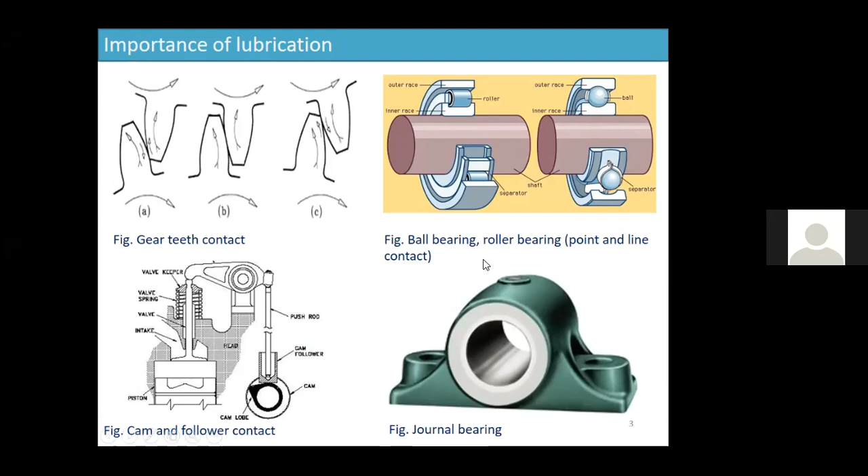So these are a few examples of lubricated machine elements, like we have gears, then roller bearing, ball bearing - that is point contact and line contact bearings, cams, journal bearings, etc. These are the most commonly used lubricated machine elements in rotating machines.

Apart from these rolling or sliding contact machine elements, we have some other applications of lubricants or cooling, like machining, then biolubrication, like we have hip joint, knee joint, shoulder joint, etc.

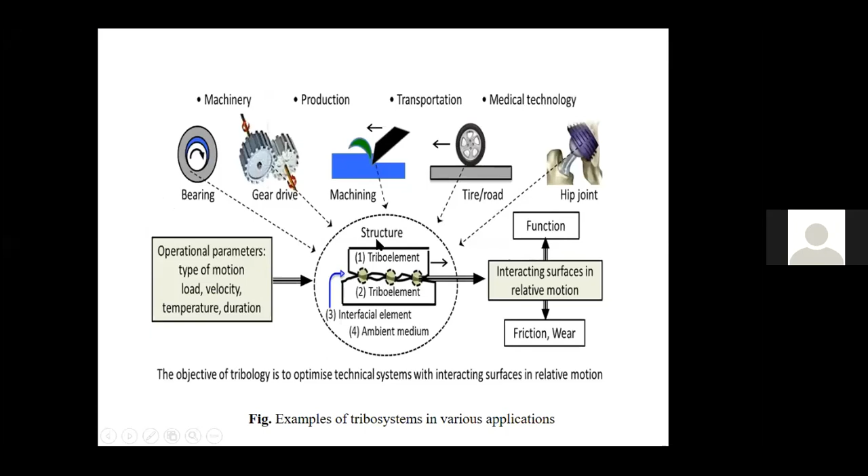So in all these lubricated machine elements, lubricant film thickness is very important. Lubricant film thickness depends on your viscosity and other properties of lubricant.

If you take the example of spur gear contacts - and it's not only spur gear - most of the lubricated machine elements will have a transition of lubrication regime in this fashion.

At the initial stage, most of the lubricated machine elements operate in hydrodynamic lubrication regime. Over a period of time, because of change in operating condition, etc., there will be transition from hydrodynamic to elasto-hydrodynamic, then boundary lubrication regime. This is an example of gear, spur gear.

Similarly, you can find these lubrication regimes in all these machine elements. The objective of lubrication is to maintain hydrodynamic or elasto-hydrodynamic lubrication regime in a rotating lubricated machine element. If you fail to maintain a proper lubrication regime, there will be transition into the boundary lubrication regime, which is not at all advisable.

For that purpose, we are using modern lubricants like SAE or other standards, along with some additives. So you can see the importance of lubricant film thickness.

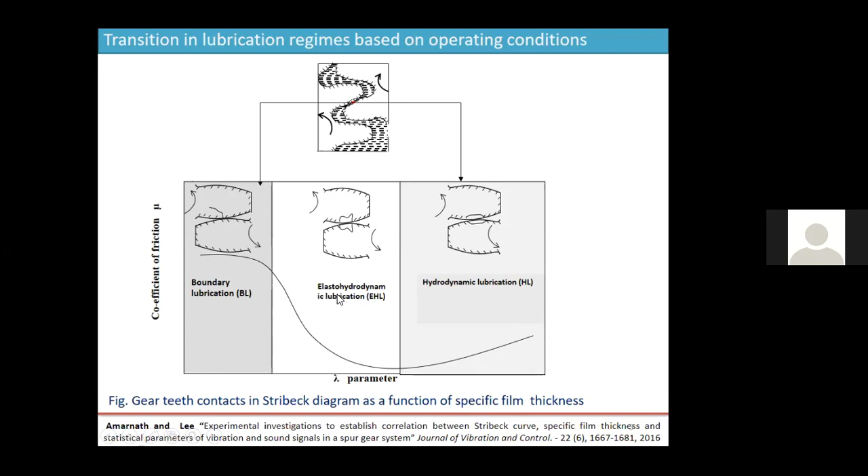If you have any questions, you can ask now, as far as this lubrication regime analysis is concerned. Or shall I proceed? No questions, sir? Okay sir. Yes. Ramchandra, any questions in this? Yeah, so at the end we'll have a couple of questions. Now we'll complete the session.

As we increase the load, temperature is increasing. So we can estimate lubricant film thickness using Dowson's equation. Here the only change in factor is load. So with respect to increase in load, lubricant film temperature is also increasing and film thickness is decreasing in this fashion.

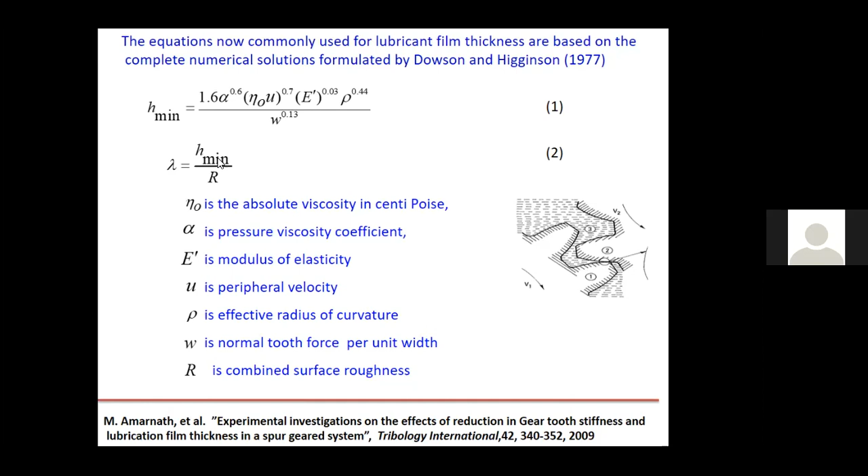So we have everything in hand, that is film thickness and combined surface roughness. By using these two parameters, you will get lambda, that is the transition of lubrication regime with respect to number of load cycles.

By using this, you can get the details of scoring damage. If lambda is greater than 3, then the scoring is minimum. It is under full film lubrication regime. Almost no wear happens, or very negligible wear happens during this full film lubrication regime.

If it is between 1.4 to 3, then it is EHL, elasto-hydrodynamic lubrication regime. If it is less than 1.4, then the gear system is operating under boundary lubrication regime. Maintenance action is supposed to be taken during boundary lubrication regime. So this is the criteria for possible scoring damage.

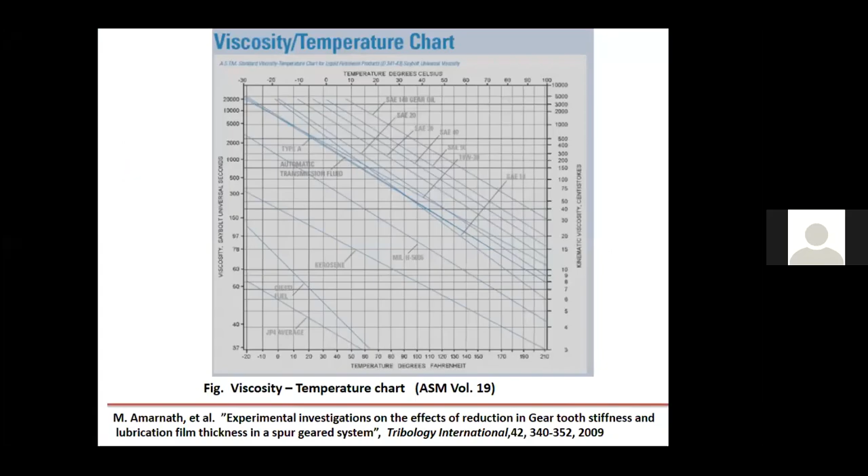In addition to this, you can also consider wear particle analysis. I'm explaining these parameters because all of them will be considered in nano lubrication regime to get the details of nano lubricant performance. All these parameters should show minimum reduction if you use nano lubricants. That is the objective of discussing these lubrication aspects of machine elements.

For example, specific film thickness - this parameter is estimated by using ordinary SAE oil. If you use nano particle based SAE oil, then the specific film thickness should improve. There will be enhancement in lubrication regimes. That is the purpose of discussing this lubricant parameter, lubrication analysis of gears.

In addition to lubrication regime analysis, we have also carried out experiments on wear particle analysis. It is very simple - you take one drop of oil, about 5 ml from the gearbox, and go for wear particle analysis. This is called wear particle morphology.

The wear particle morphology gives the details of wear progression in the gearbox. Not only in gearbox, it can be a bearing, an engine, etc. This is a typical image of wear particle analysis. Based on this morphology, you can get the details of wear propagation in the machine element.

This is done using a filtration system, called the filtergram technique. A vacuum pump is used, and a cellulose membrane filter paper is used to filter out the wear particles from the lubricant sample. The lubricant oil is dissolved in acetone or some other appropriate chemical for filtration, about 1:50 ratio. Then it is filtered using this filtration system.

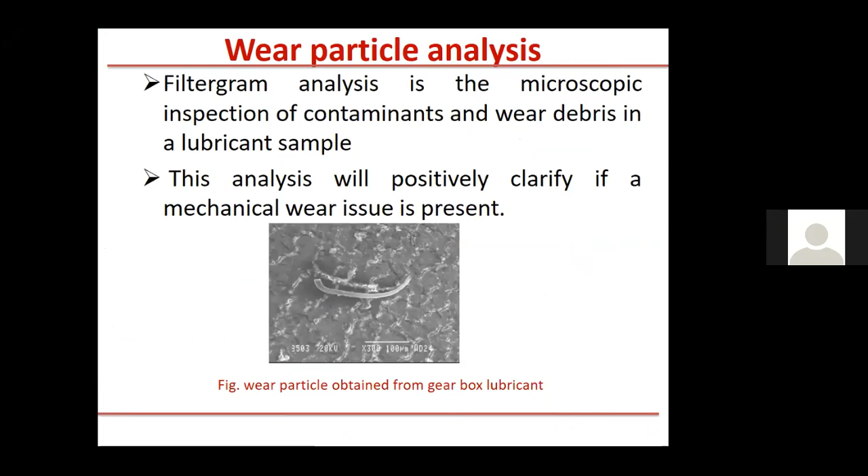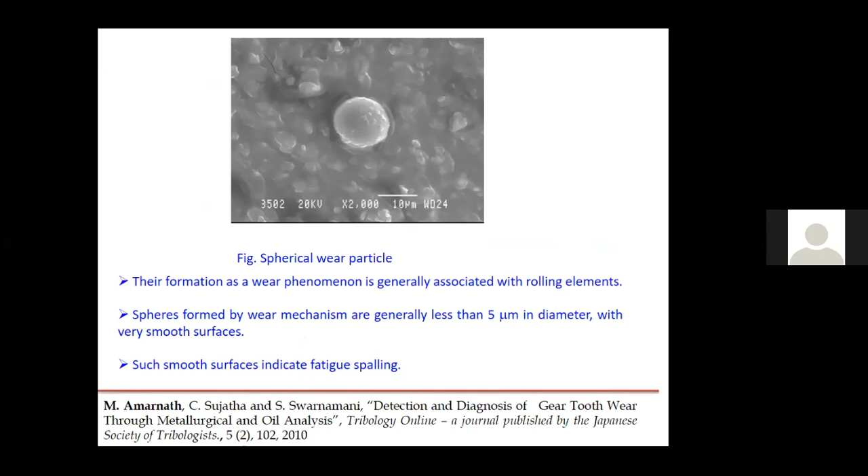There is a direct relation between wear and vibration. When wear increases, there will be variation in stiffness of machine element. Because of this variation, it will directly affect the dynamic response of the machine element. That will be diagnosed using vibration analysis.

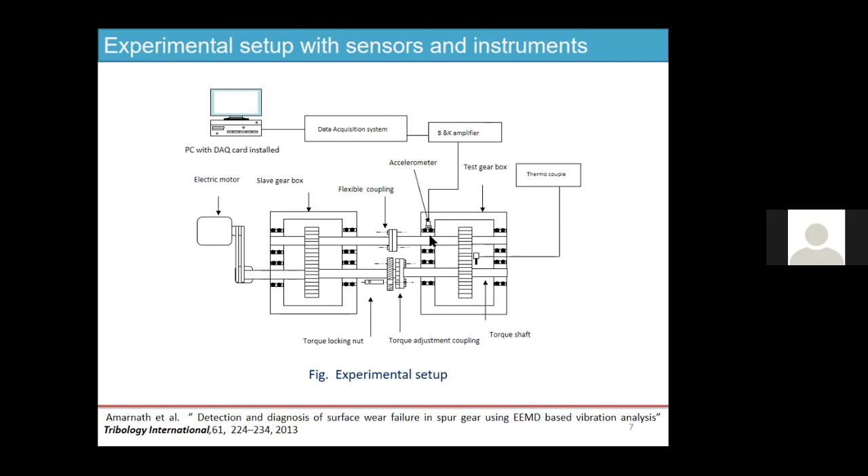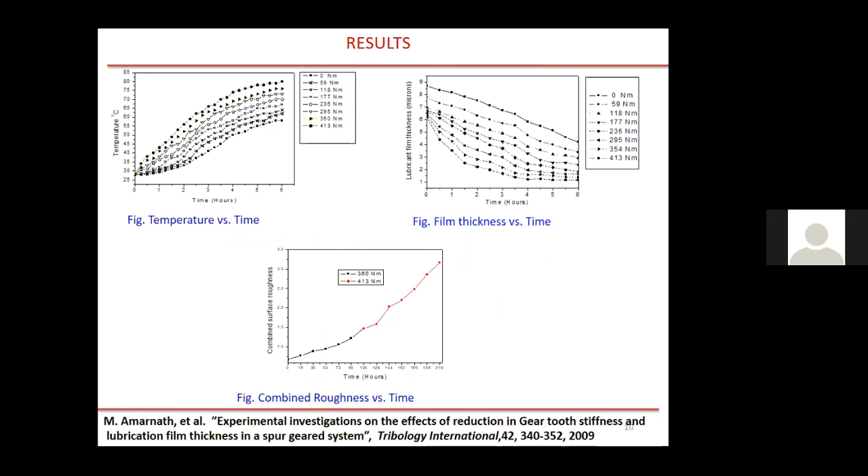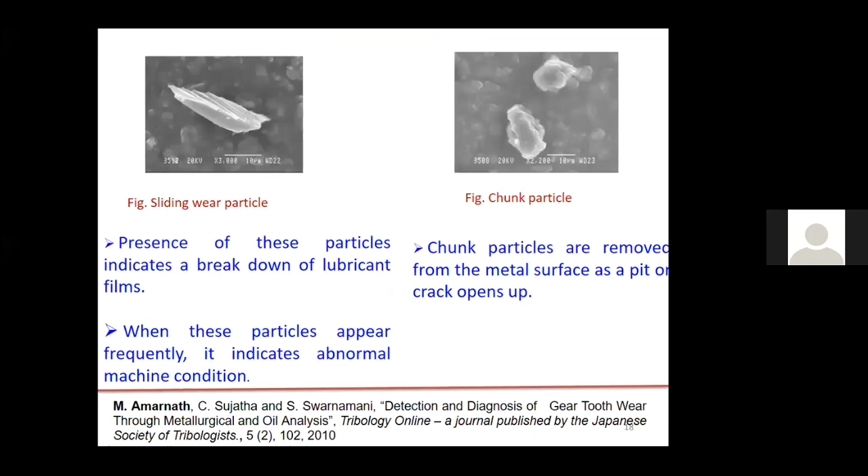So these are some details of lubrication regime analysis and its effect on wear in a geared system. Similar trends will be there in other machine elements like roller bearings, ball bearings, journal bearings, cams, IC engine components, etc.

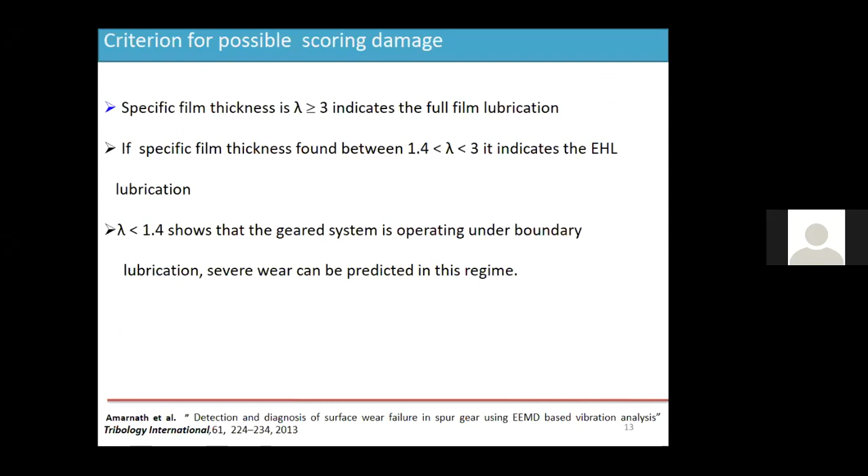We can use film thickness analysis, vibration monitoring analysis, wear particle analysis, oil contamination analysis, etc. The purpose of using nano lubricant is to minimize the severity of these wear parameters and maximize the performance of lubricated machine elements.

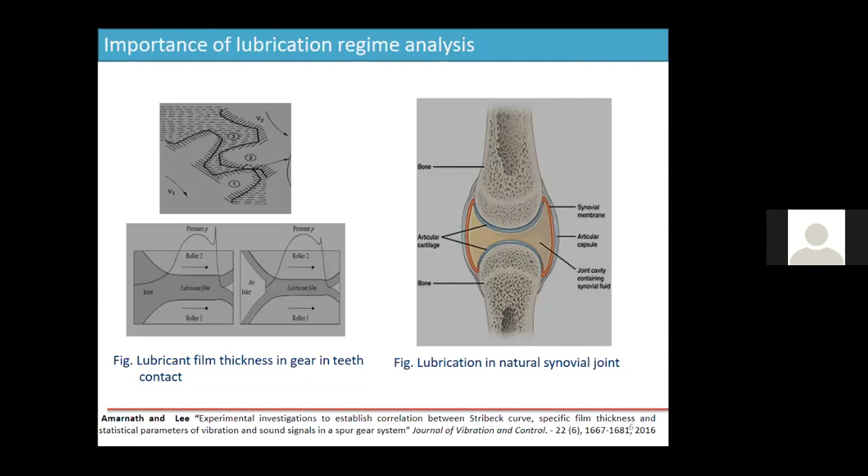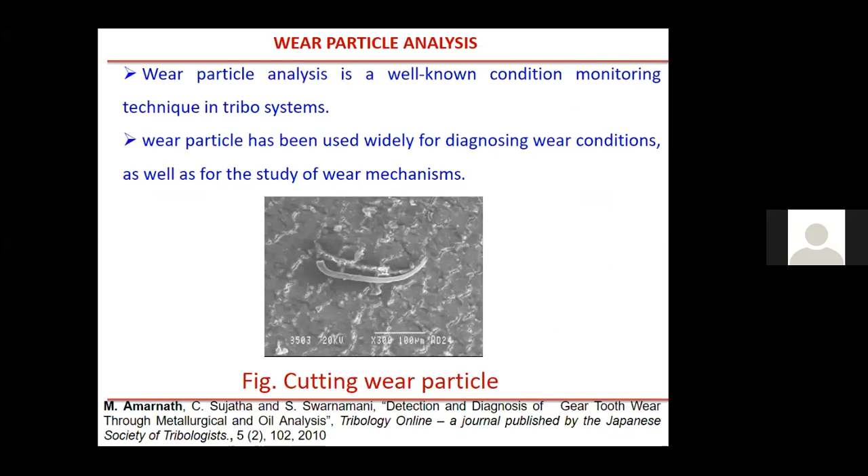So in order to know the details of nano lubrication, we have discussed the lubrication regime of machine elements, and now we shall go to nano lubrication aspects. We discussed film thickness analysis, surface fatigue wear analysis on gear tooth contact surfaces, wear particle analysis and corresponding vibration signal analysis. These are the common parameters discussed in assessment of wear in lubricated machine elements.

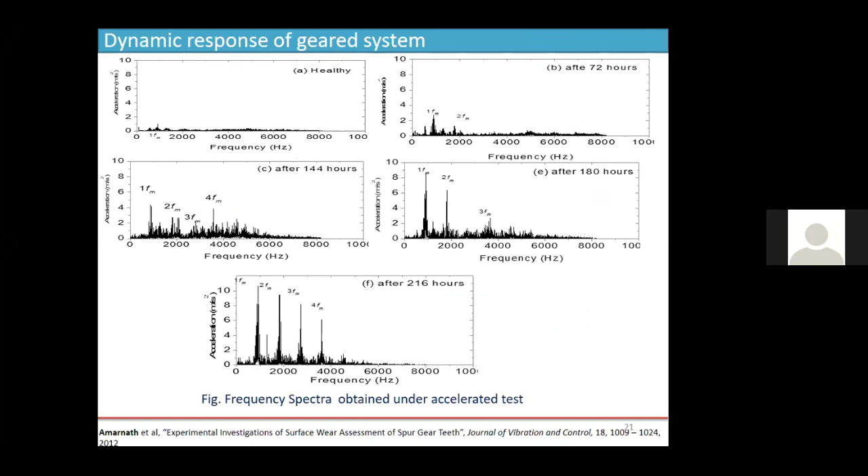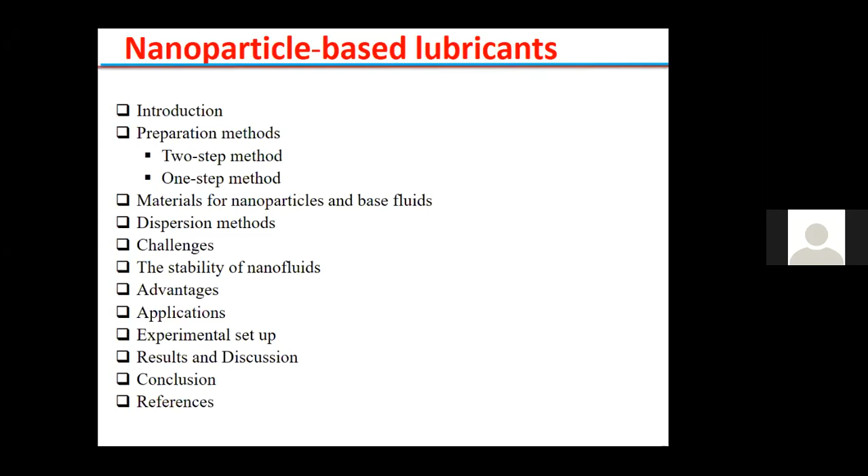Let us see how nanoparticles help minimize wear in lubricated machine elements. We need to know the preparation methods, materials for nanoparticles and base fluids, dispersion methods, challenges, stability of nanofluids, advantages and applications. Our experimental setup is also there to analyze the performance of nanoparticle based lubricants.

Nanofluids were coined by Stephen Choi in 1995. Nanofluids are a comparatively new class of fluids engineered by dispersing nanometer-sized materials in a base fluid. Nanoparticles possess thermophysical properties such as thermal conductivity, thermal diffusivity, viscosity, and convective heat transfer coefficient, etc.

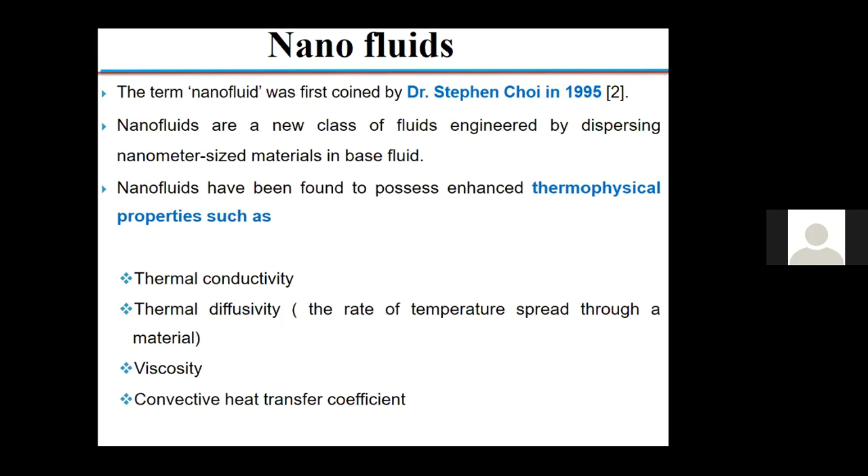We have various nanoparticles and base fluids. Metallic nanoparticles, non-metallic oxides, carbides, ceramics, and hybrid nanoparticles are there. Base fluids can be water, oil and other lubricants, biofluids, polymer solutions, etc.

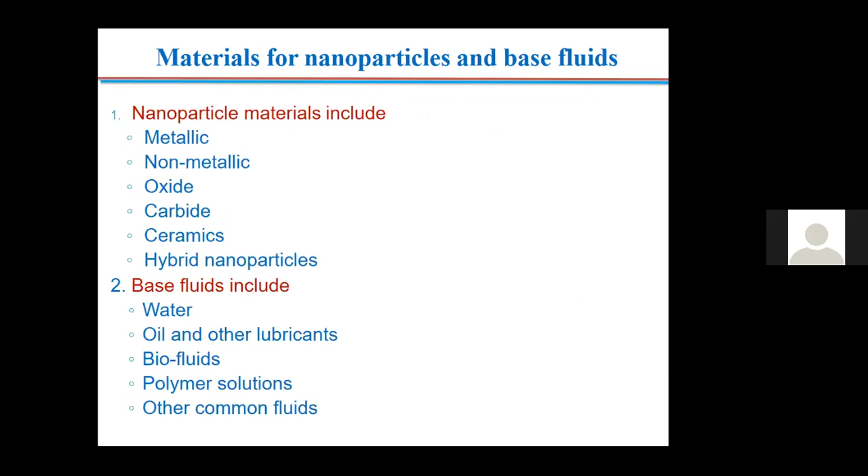There are two methods to prepare particle-based lubricants. The first is the one-step method, where you simultaneously make and disperse the nanoparticles in the fluid. This method can prepare uniformly dispersed nanoparticles, but the one-step physical method cannot synthesize nanofluids on a large scale, and the cost is also high.

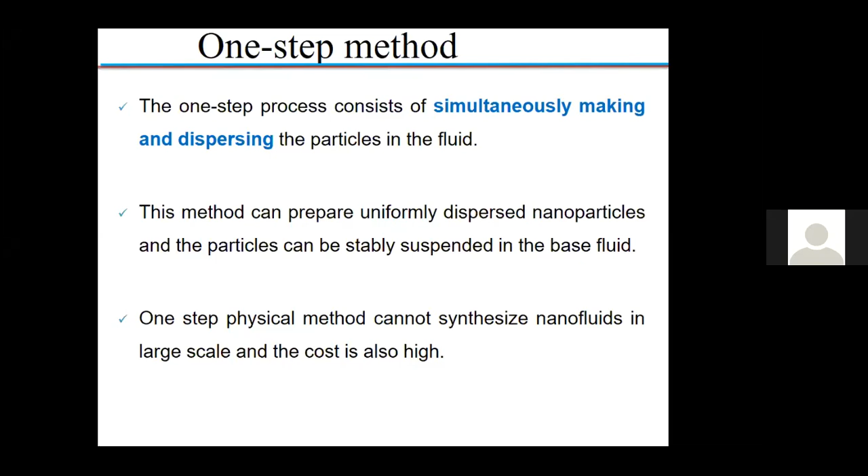Hence the other option is the two-step method, shown in this diagram. We have nanoparticles and base fluids, which undergo direct mixing. Then a dispersant is added to improve the stability of the nanoparticles. Then we go for sonication, and you get the nanofluid. This two-step method is the most popular approach for nanoparticle-based lubricant preparation.

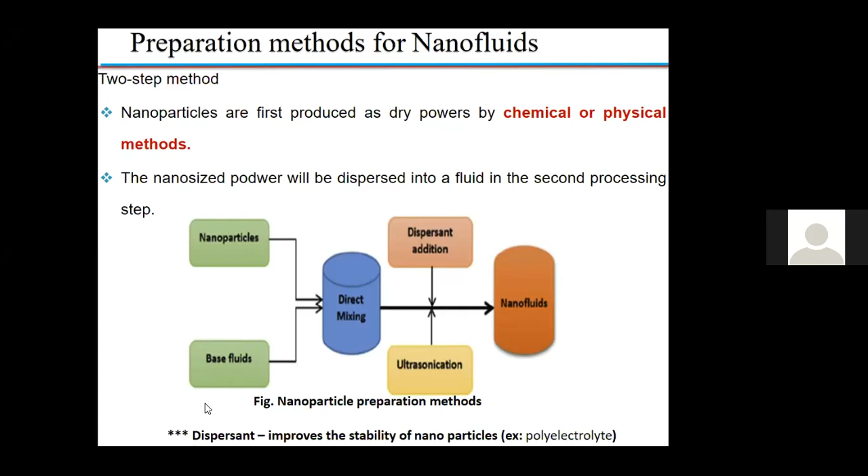These are some instruments used to prepare nanofluids: probe sonication, ultrasonic bath, and ball milling are some instruments used to prepare nanoparticles.

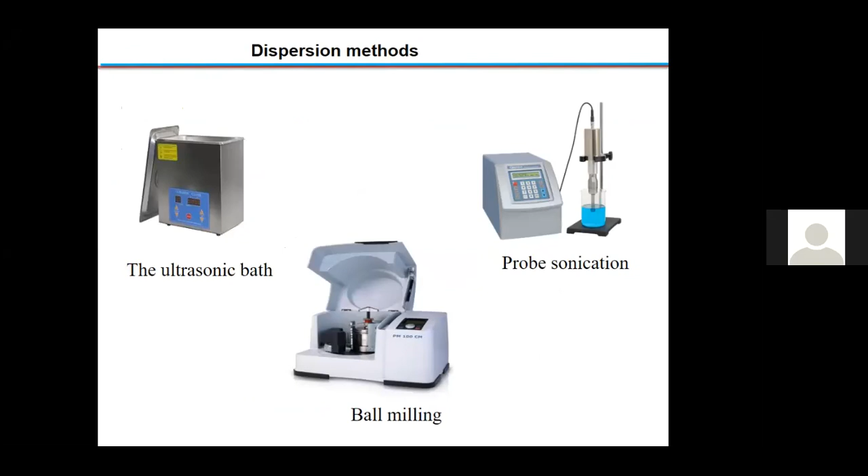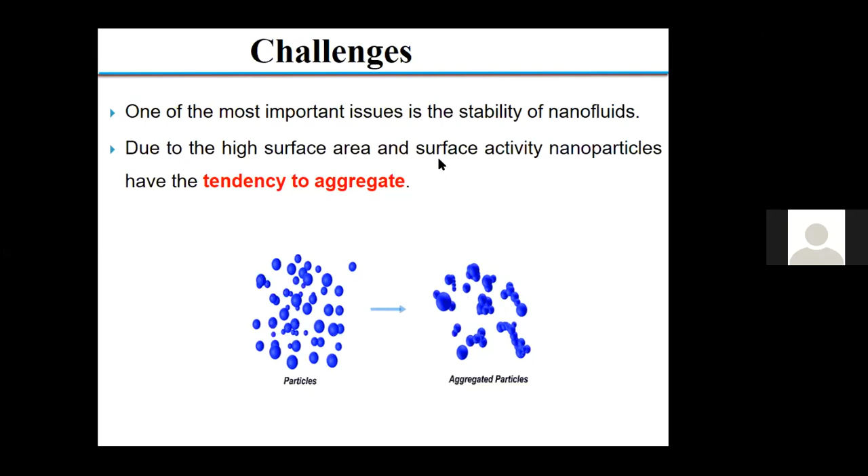The biggest challenge is that due to high surface area and surface activity, nanoparticles have a tendency to aggregate. That is one of the challenges with nanoparticles. You can see aggregated nanoparticles here, which happens because of their high surface area and surface activity.

Wear and friction can be minimized by using nanoparticles. We should know how. First, we have the rolling effect: nanoparticles become rollers between the two sliding contact surfaces, which minimizes friction. In some cases, based on the structure of the nanoparticle, it becomes a protective film.

In the mending effect, the nanoparticles go and settle in the valleys or cracks of sliding or rolling contact machine elements.

Then there's the polishing effect, which also helps minimize wear. So in this way, any one or a combination of these effects will work to minimize friction and wear in rolling or sliding contact machine elements. This is how the nanoparticle works during lubrication.

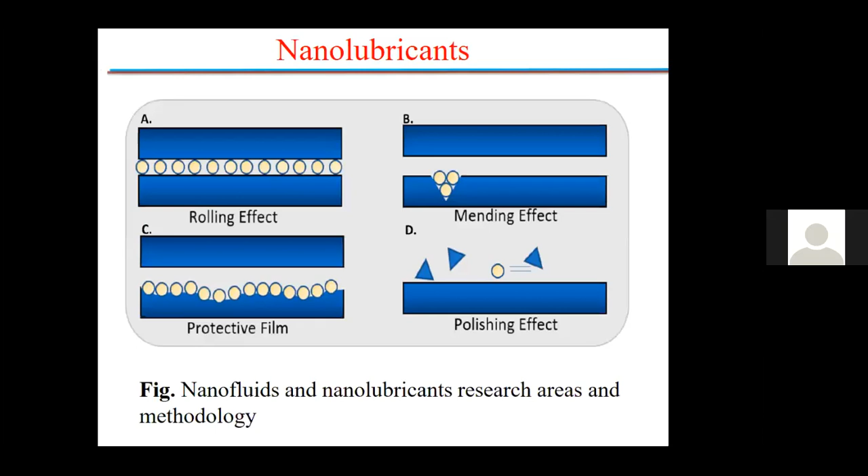We have some important tribological properties of nanofluids: they reduce friction, increase the load carrying capacity of the lubricating fluid, and have anti-wear characteristics. In order to assess these properties of nano lubricant...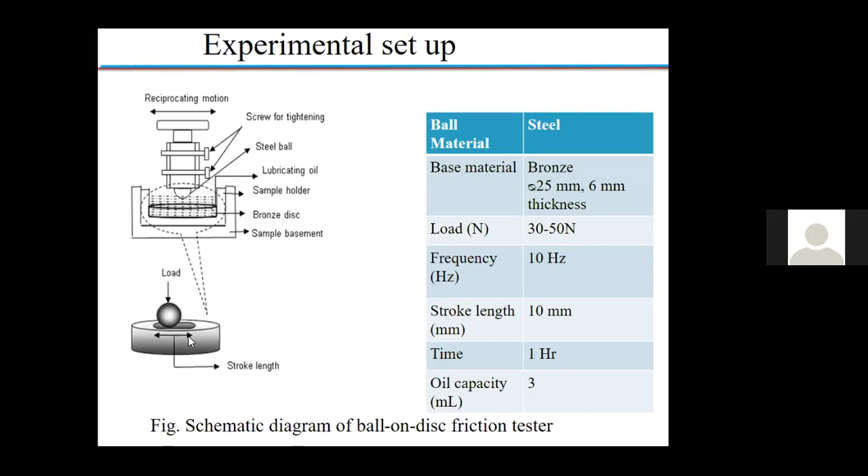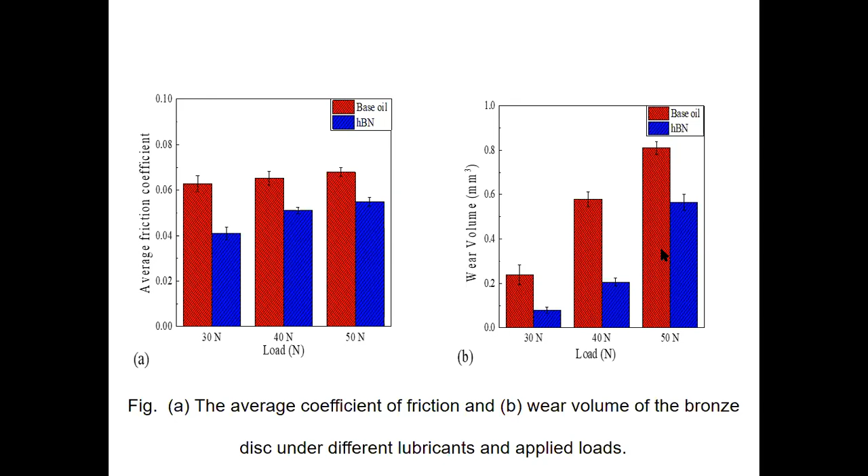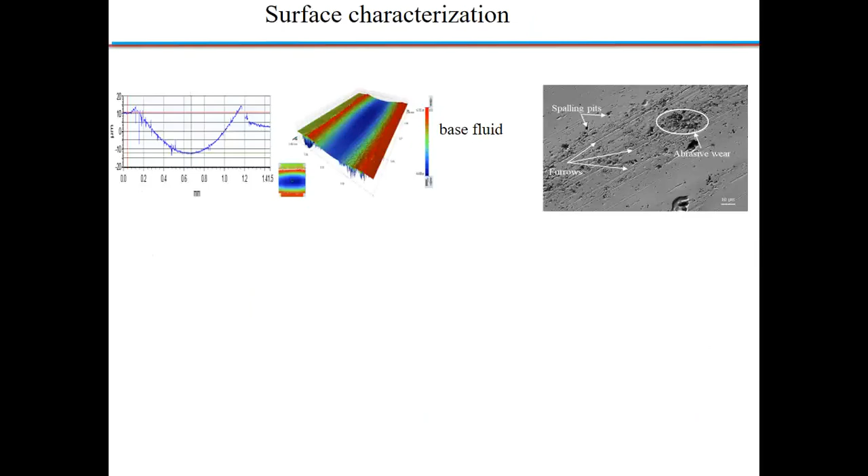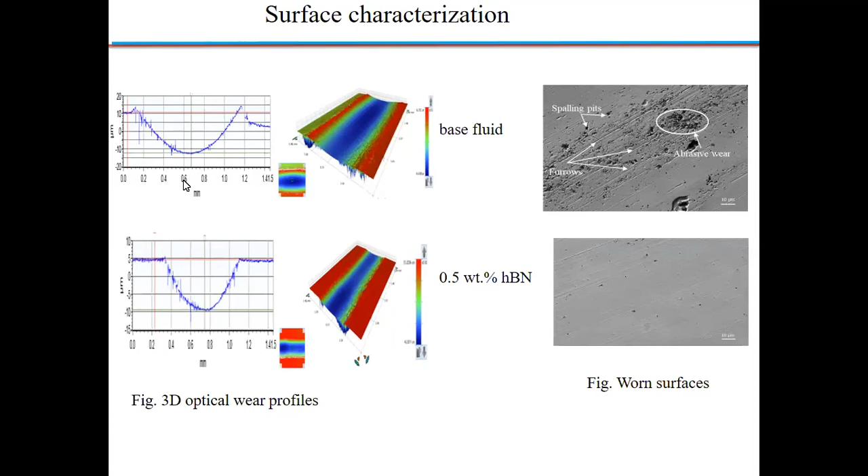You can also do surface characterization using a 3D profilometer. This is the image of the base fluid, and you can see the reduction in width of wear in the case of nano lubricant, HBN based nano lubricant. 0.5% weight of HBN results in a significant reduction in width of the wear track. This is the advantage of nano HBN nanoparticles.

This is the wear severity. You can see the worn surfaces. A significant reduction in wear will be there in the case of HBN. This is one case study we carried out.

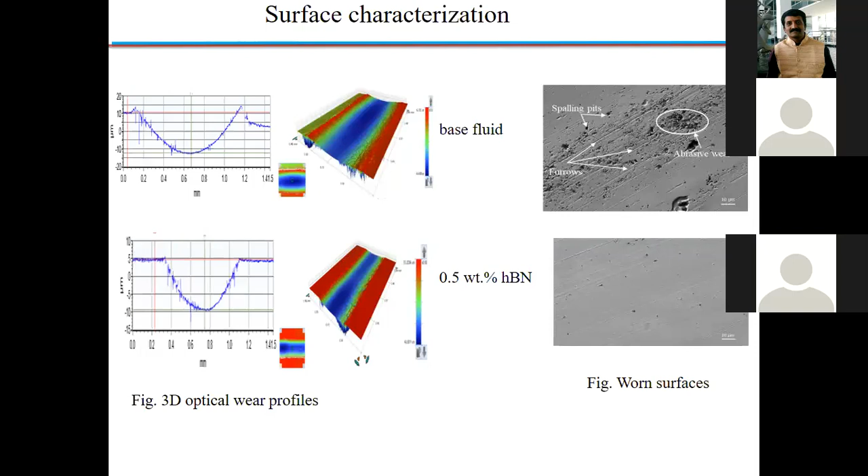Of course, various options are there, so we have to consider the optimum one. We have to minimize the wear and friction on rolling or sliding contact machine elements as much as possible. For that purpose, we have considered carbon nanotube.

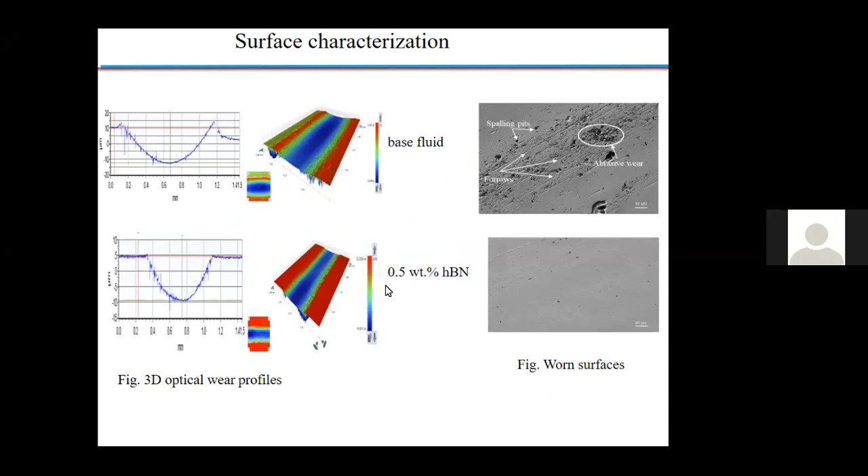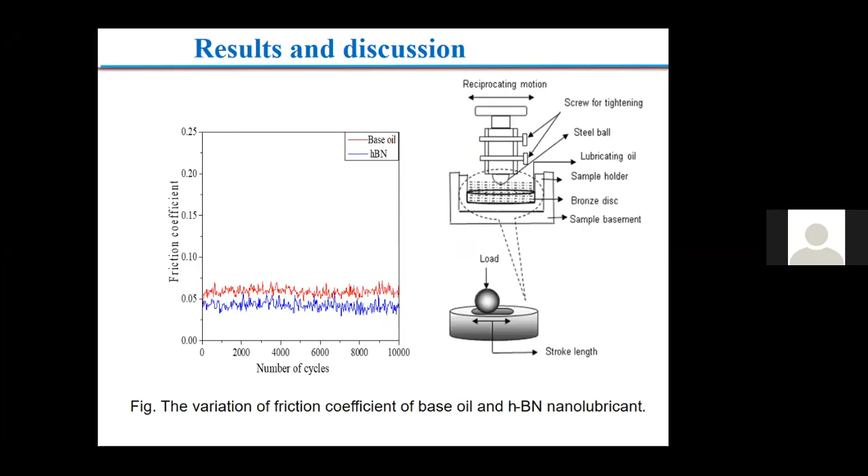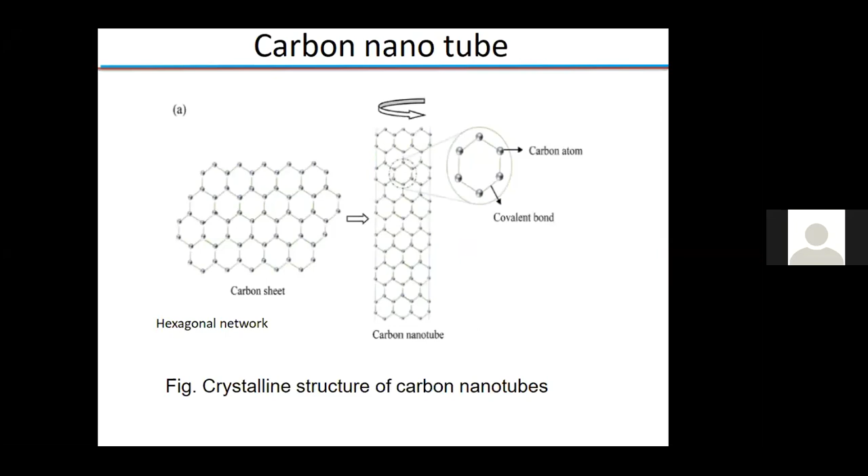This is another option, so we have to go for maximum reduction in friction and wear by considering the appropriate nanoparticle. At the initial stage, we used HBN nanoparticle, boron nitride. Then we found another option to minimize wear and friction to a greater extent. For that purpose, we considered carbon nanotube. This is the crystalline structure of carbon nanotube.

These are the details of the carbon nanotube. It is an extensively studied carbon nanomaterial. The crystalline structure of CNT has a hexagonal network in which carbon atoms are strongly held together by covalent bonds.

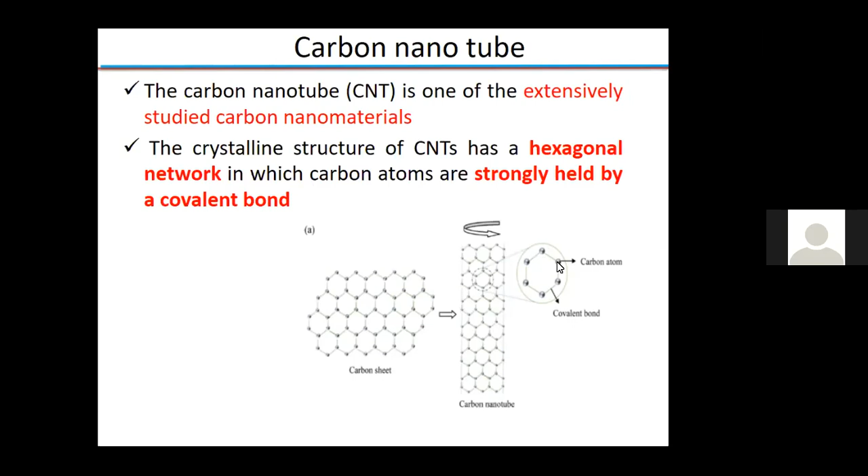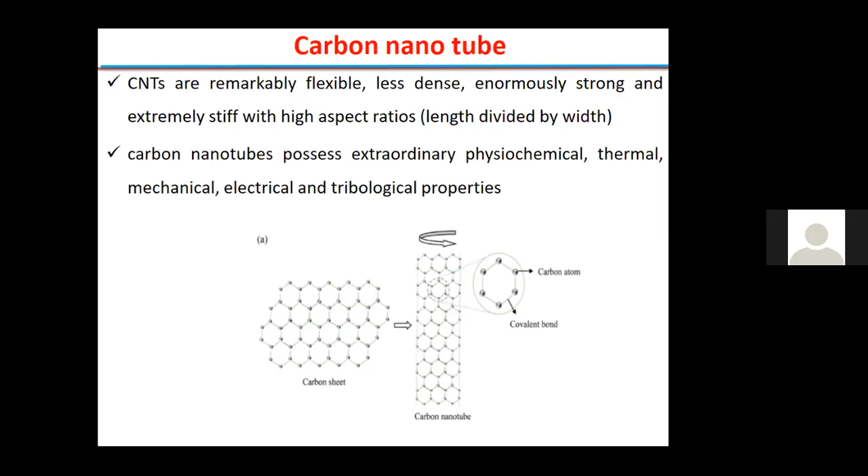This gives it advantages. CNTs are remarkably flexible, less dense, enormously strong, and extremely stiff with a high aspect ratio, that is length by width ratio. Carbon nanotubes possess extraordinary physiochemical, thermal, mechanical, electrical, and tribological properties. That's why it is extensively used to minimize friction and wear in lubricated machine elements, and also used in composites, etc., because of these properties.

We are going to use a functionalization method to enhance the properties and characteristics of nanoparticles by surface modification. Functionalization enables nanoparticles to play a major role in the field of tribology and lubrication. Let us see how we go ahead with the functionalization.

This is SEM images of multi-wall carbon nanotubes, functionalized carbon nanotubes, and nano boric acid. We are going to use functionalization, which enhances the properties and characteristics of nanoparticles.

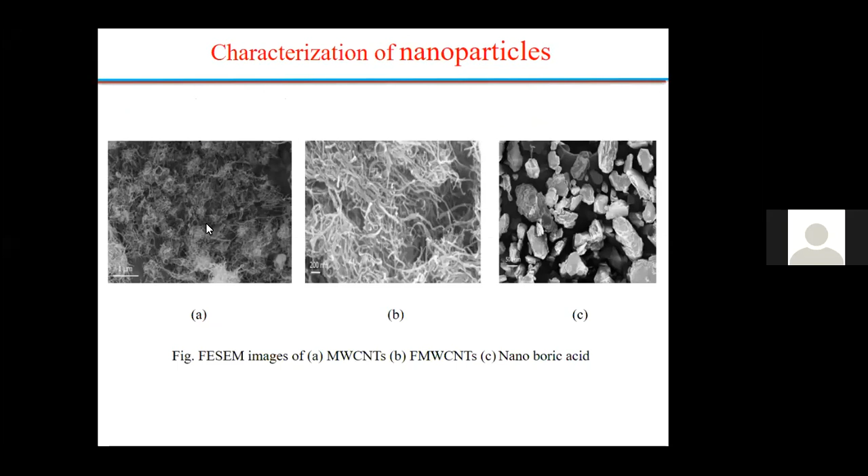This is multi-wall carbon nanotubes and functionalized multi-wall carbon nanotubes. Let us see how we go for functionalization. Here we have considered multi-wall carbon nanotubes.

We added H2SO4 and HNO3 in a 3:1 mixture. We heated it up to 80 degrees for up to 2 hours. Then it is filtered using a 0.2 micrometer membrane. The filtered solid is dried at 60 degrees for 24 hours. Then you will get functionalized multi-wall carbon nanotubes in this fashion.

Multi-wall carbon nanotube, after functionalization, becomes like this. The advantage is it enhances the properties and characteristics of nanoparticles. Let us see how it works.

Initially we start with fresh SAE oil at 0.25%, 0.5%, 0.75%, and 1%. In most cases we go up to 1%. Between 0.25 to 1%, you will get optimum wear, a significant reduction in wear. It depends on the type of nanoparticle used and the application or problem under investigation.

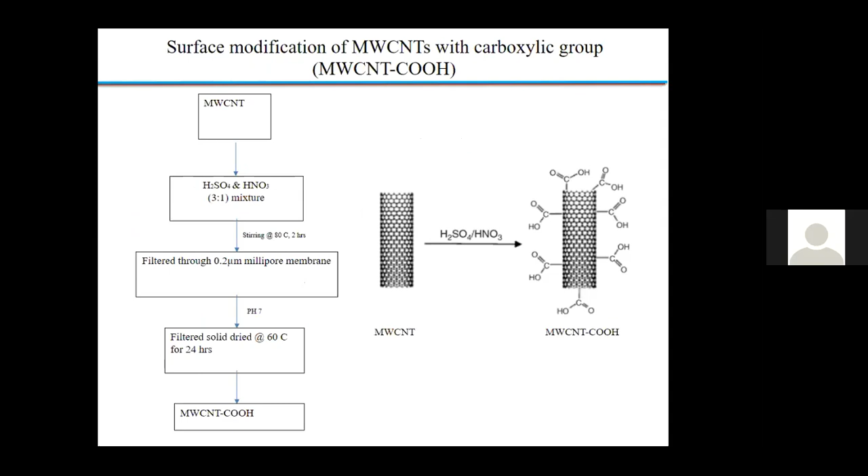Friction and wear volume parameters are plotted with respect to increase in load. Here the friction and wear parameters have been plotted with respect to increase in speed, from 5 hertz to 15 hertz. In both cases, there is a significant reduction in wear and friction coefficient for functionalized multi-wall carbon nanotubes. These are the results for various loads and speed operating conditions.

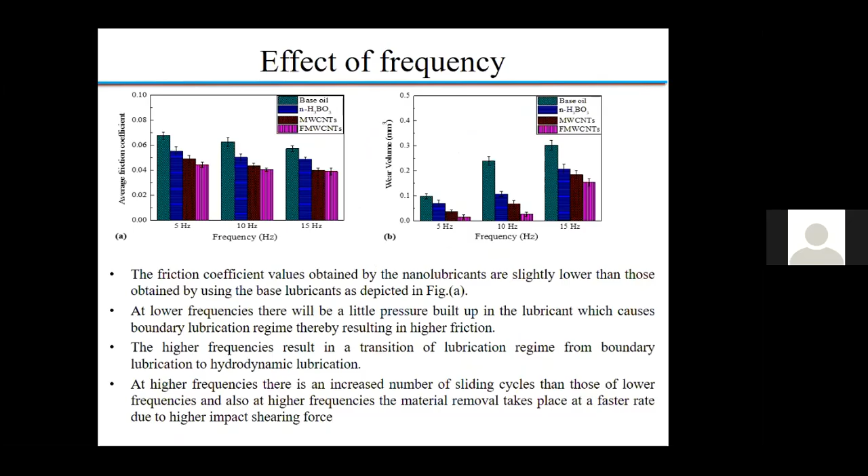So the results were obtained, and the optimum results were obtained for 0.5 weight percent. Initially we started from 0.25%, then 0.5, 0.75, and 1%. Among these percentages, 0.5% provided the better results.

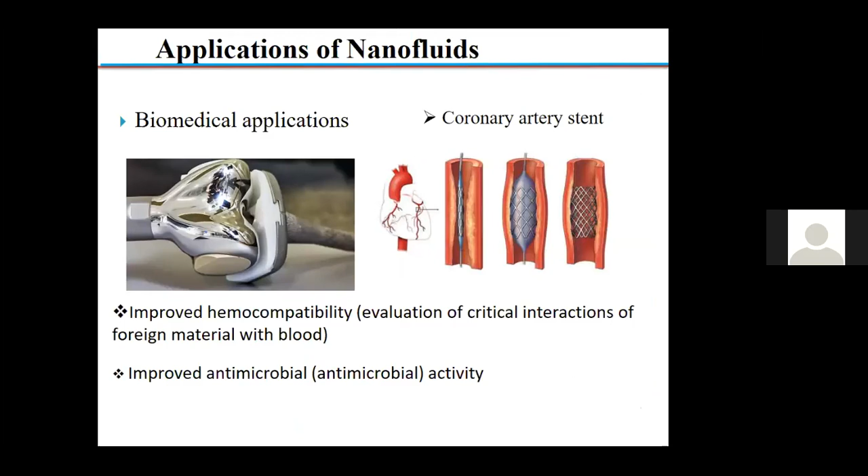So these are some case studies as far as sliding or rolling contact machine elements are concerned. In addition, nanofluids and nanoparticles are also used in biomedical applications, coronary artery stent fabrication, and metal cutting applications.

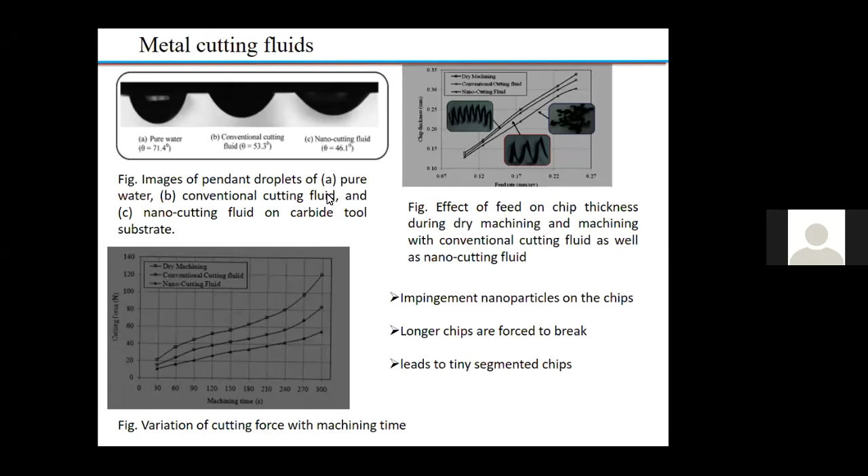By adding nanoparticles, we can have better adsorption on the metallic surface, which minimizes cutting forces as well as wear, that is, flank wear on single or multi-point cutting tools.

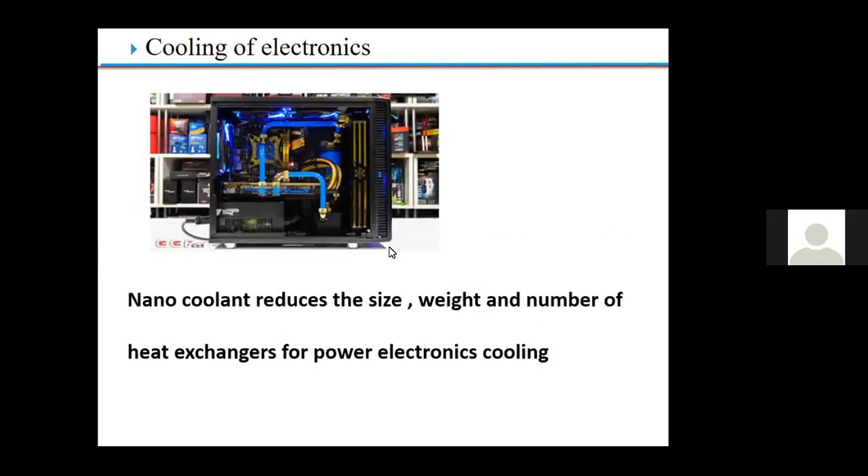Then cooling of electronics. Nano coolant reduces the size, weight, and number of heat exchangers in electronic equipment cooling. It is also used in IC engine cooling and transformer oil cooling. These are various applications.

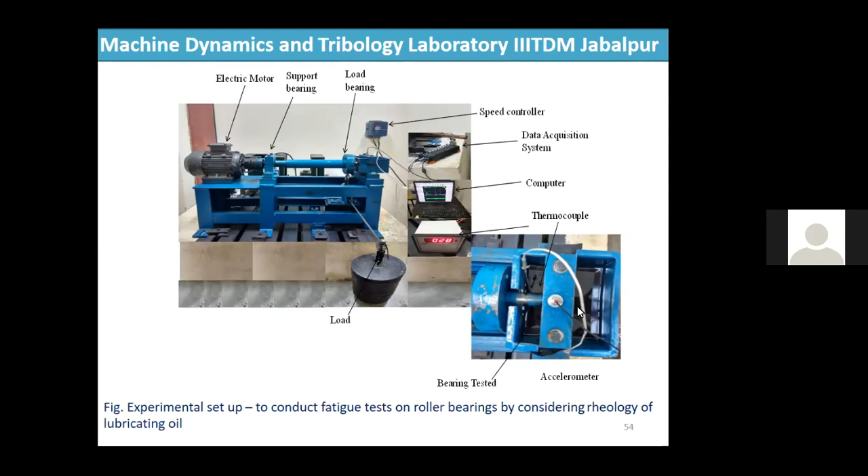These testings belong to my laboratory. Those who are interested can take the details of these experiments.

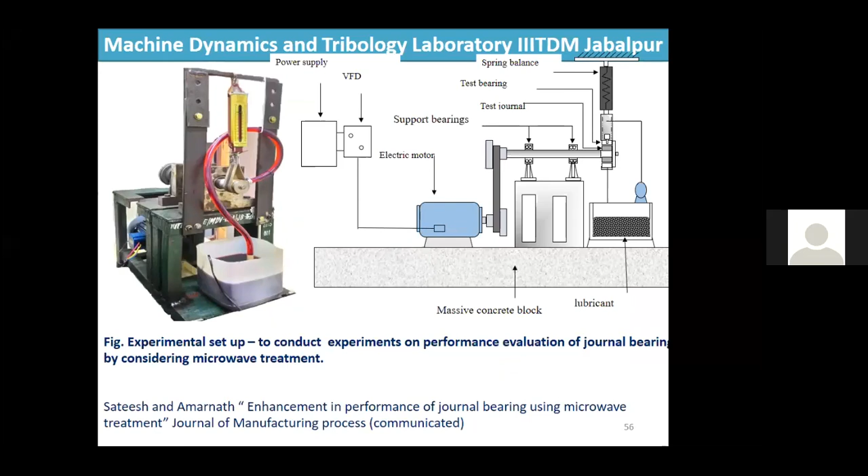I'm also working in heat treatment using microwave treatment analysis, which enhances the mechanical properties of machine elements. I am using a journal bearing - the bearing material was exposed to microwaves to enhance their properties. So this modified mechanical properties bearing was used for conducting wear tests.

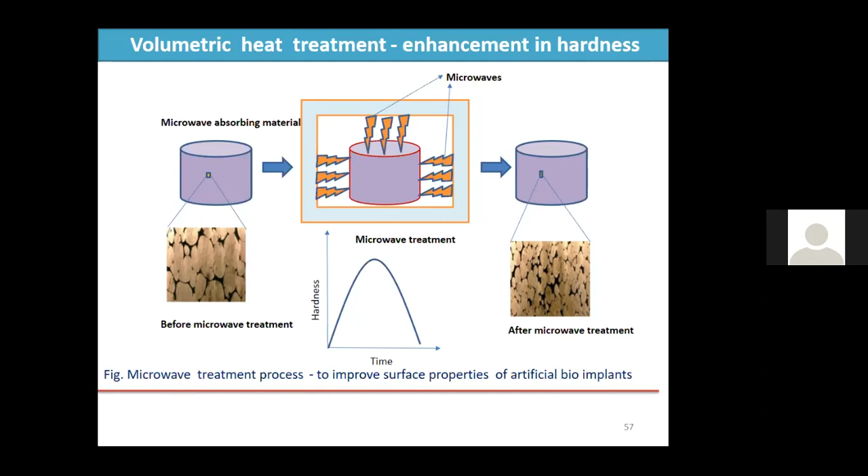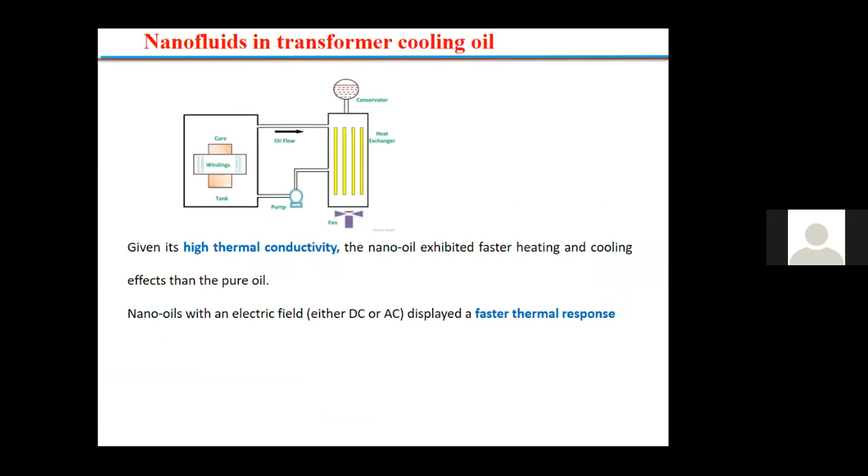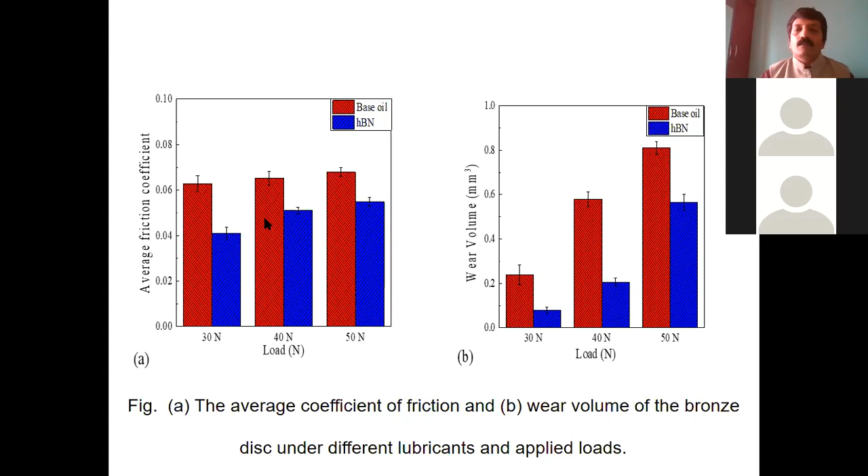One more question, Pankaj Kesri has asked: how to reduce agglomeration of nanoparticles in base fluid? By functionalization - yeah, this method is there.

This one. Okay, this way. So here you can see.

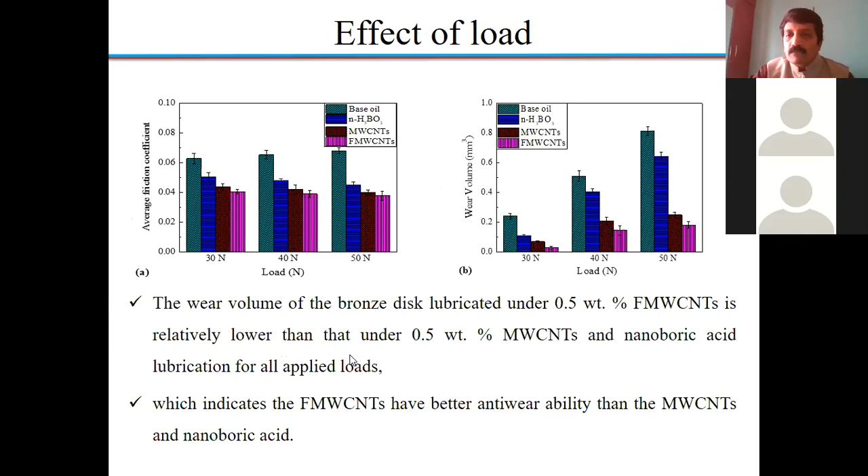Thank you, one more question. Prashant Acharya has asked: how good are molybdenum disulfide and zinc oxide nanoparticles when compared to boric acid and carbon nanotube particles in vehicle lubrication?

Among all nanoparticles, multi-wall carbon nanotubes are giving better results. You have to conduct experiments and observe.

In vehicle lubrication also, you can go percentage wise. For example, if you are pouring about 3 liters of oil, you can use 0.3% or 0.25% of nanoparticles. You follow the procedure and observe the reduction in wear. So you have to conduct experiments.

Before that, simulators are there - piston ring simulators, piston material simulators. You conduct basic experiments and then go for these actual experiments. Among all nanoparticles, multi-wall carbon nanotubes are giving better results.

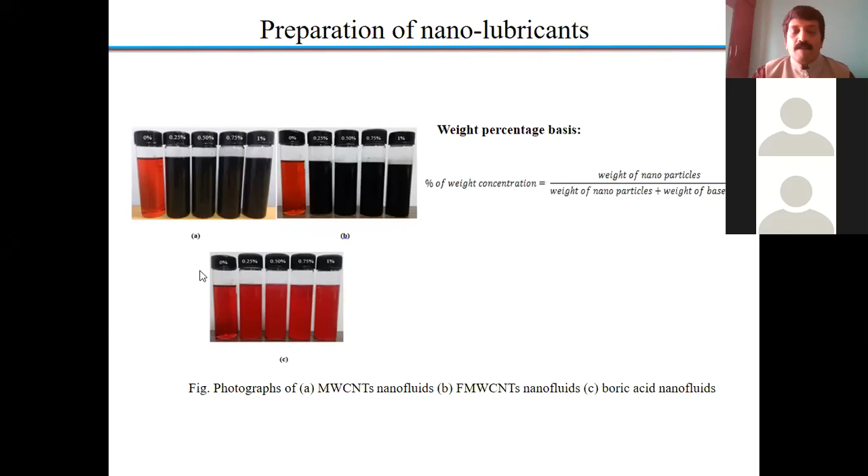One more question from son: please brief about new research areas available in nano lubricants or applications. So now functionalization and hybrid nanoparticles are coming up.

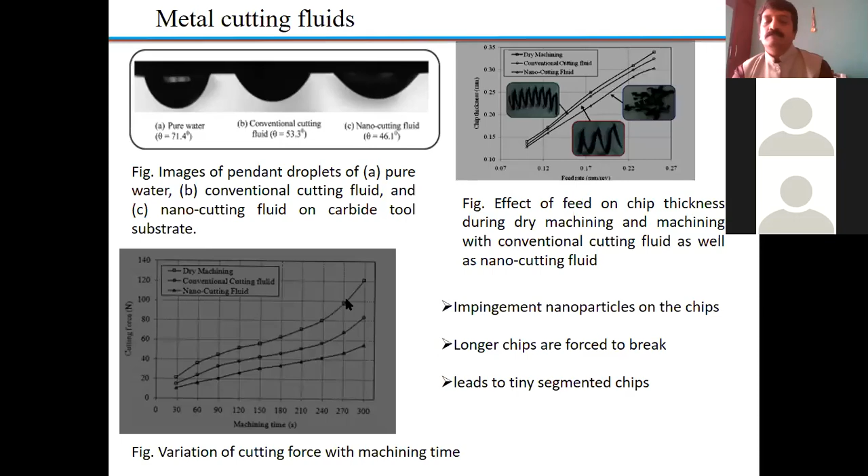For that also, just go through my research publications on Google Scholar. One paper is published on hybrid nanoparticles. We will be adding 2 or 3 nanoparticles to enhance its performance - option 1, option 2.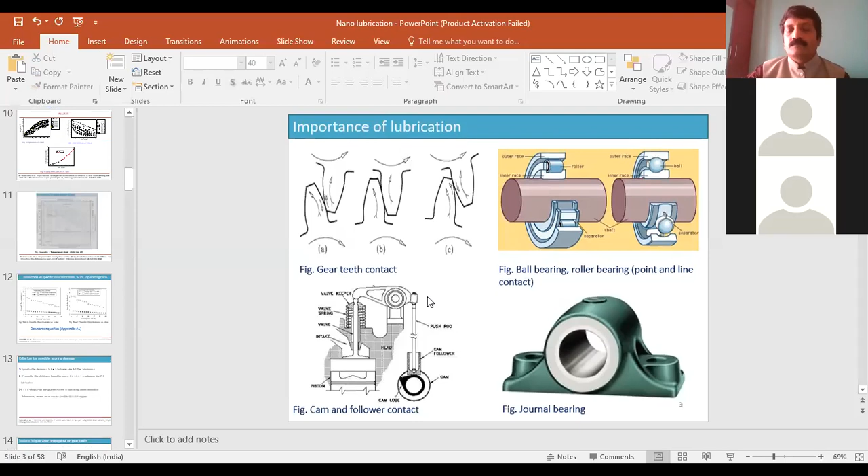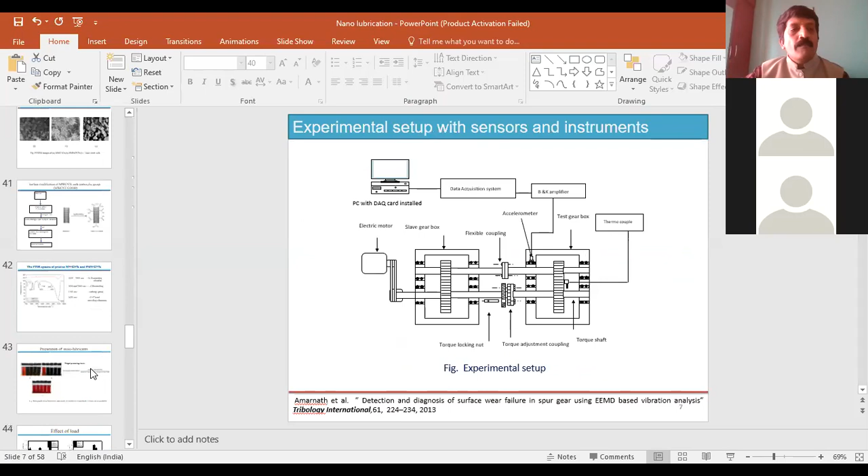Application of these nanoparticles, nanolubricants on actual machine elements - there are very few papers published. You can also try that, because we can use this kind of test rigs.

These are fundamental experiments. There are many papers published on these fundamental experiments, like I showed you the tribometer. So with this tribometer you can conduct fundamental experiments, but in the actual case, what happens? Very few papers are there.

That gap you can take up - hybrid nanoparticles and actual machine element cases. Only limited work has been carried out there. So you can choose your own area.

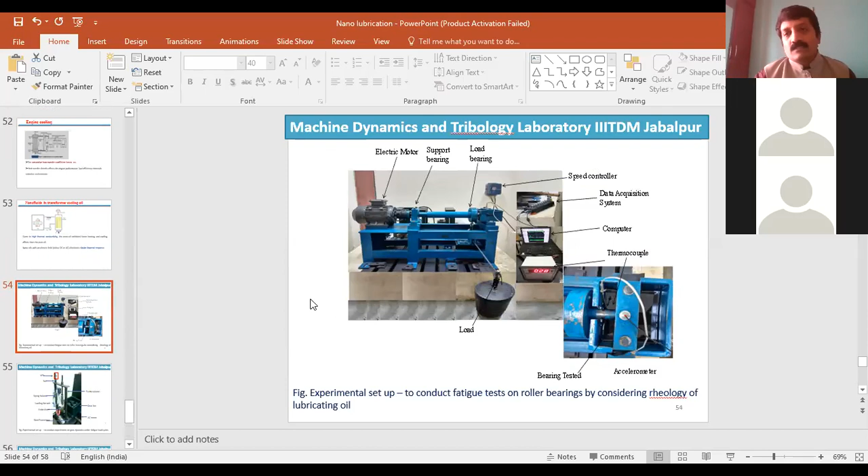There is vast research opportunity available under this nanotechnology. So based on your interest, you go through the literature and then decide whether nano lubricants or any other particular application.

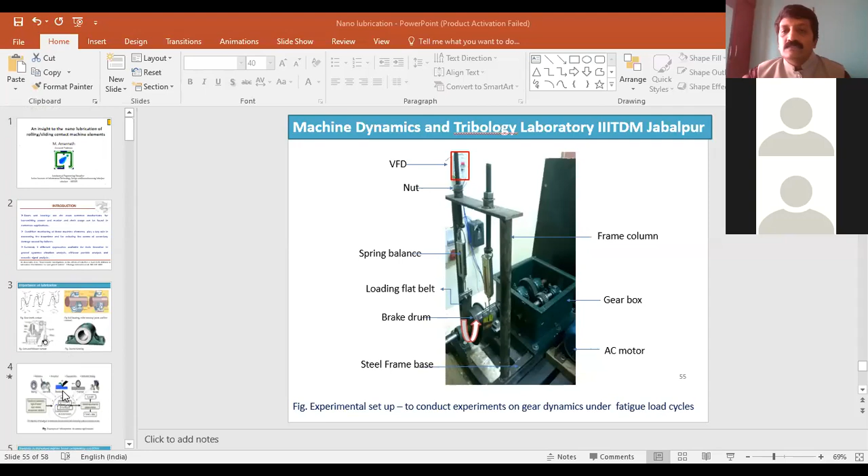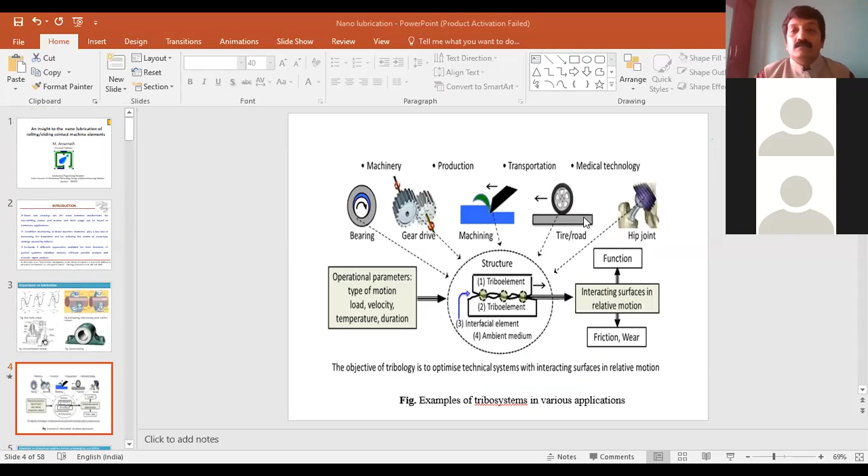So these are some applications where nanoparticles are used - lubricated machine elements, then machining applications, biotribology, automobile applications, fabrication, etc.

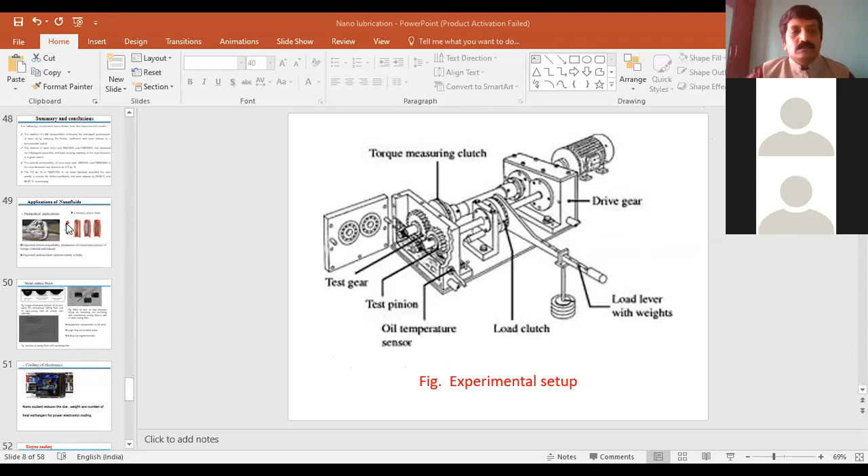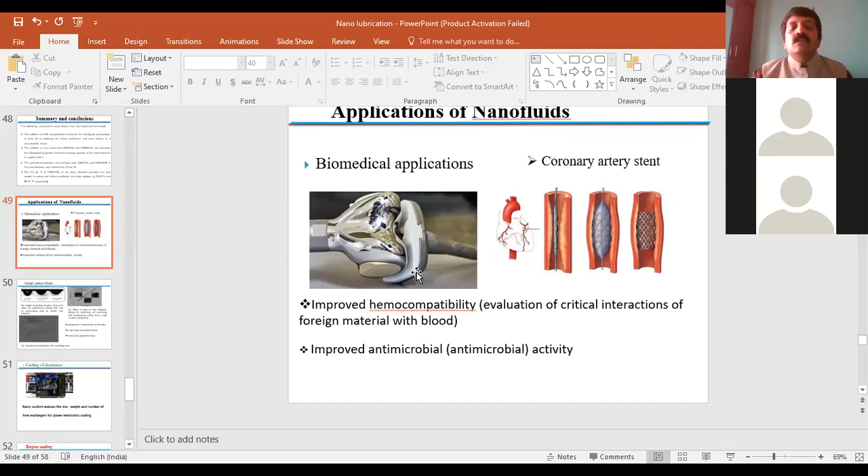I think I discussed this already - I should go to that. These are some biomedical applications - lubrication as well as other applications like nanomaterials, nano biomaterials, coatings, and machining applications.

Many applications - cooling of electronics, engine cooling. You can find a number of papers published in these areas. Yes, even heat exchanger applications you can use.